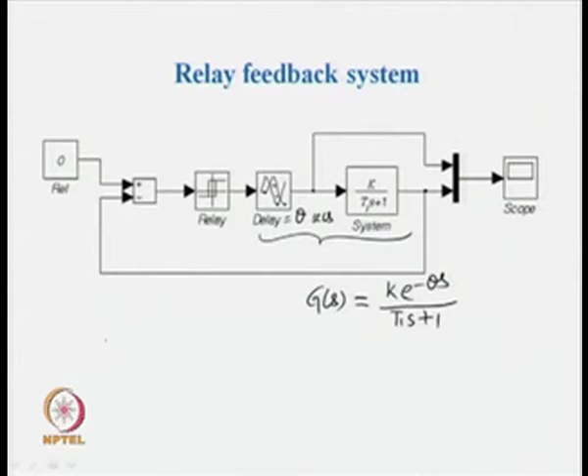We have derived analytical expressions for this simple system, the first order plus dead time system, and found that the output is governed by two expressions: y(t) equals k h times (1 minus e to the power minus t upon t1) for the time range 0 less than or equal to t less than or equal to theta, and y(t) equals k h times (2 e to the power minus (t minus theta) by t1 minus e to the power minus t by t1, minus 1.

This second expression holds for the time range theta to pu by 2.

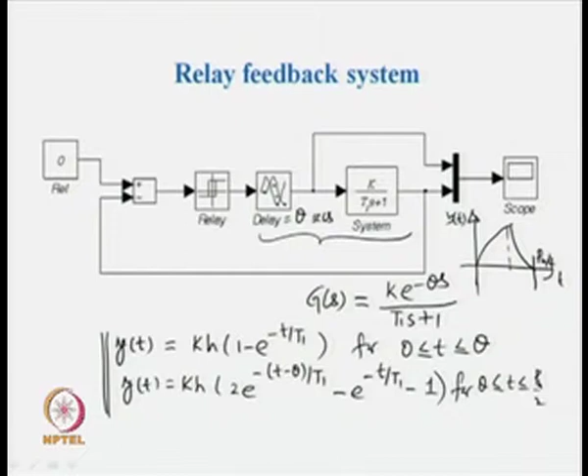So these two equations for y(t) can be plotted, and in that case the output will take this shape, where the time span is pu by 2, the peak occurs at time t equal to theta, and the plot begins at time t equal to 0.

We have also derived analytical expressions explicitly meant for a stable first order plus dead time system, and those analytical expressions are found to be of these forms.

The condition for sustained oscillatory output is given by the expression: 2 e to the power minus (pu by 2 minus theta) by t1, minus e to the power minus (pu by 2) t1, minus 1, equals 0. This condition has to be met, then only one can expect sustained oscillatory output from a first order plus dead time system.

The peak amplitude of the relay test is expected to be obtained from the expression: Ap equals k h times (1 minus e to the power minus theta upon t1), assuming that the peak occurs at time t equal to theta.

This is not an assumption - as far as first order plus dead time systems and their relay tests are concerned, the peak definitely occurs at time t equal to theta. The analytical expressions give a plot for y(t) up to time t equal to theta, after which the values decrease because the input to the system changes from positive h to minus h. Because of this change in input, the output slides down and comes back to 0 at time t equal to pu by 2.

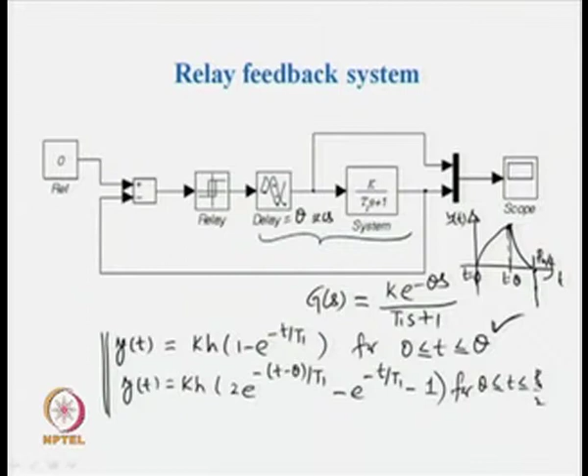Now these two expressions can be used further for identifying a simple transfer function model. What do we mean by a simple transfer function model? Let us consider initially the identification of an integrator with delay.

The identification of a system given by the transfer function G(s) equals k bar e to the power minus theta s upon s. So when the system is of this form, what sort of output is expected from the system?

Under relay test, we know that for such a system the output will be triangular pulses only. We will concentrate on only the positive half of the output for developing analytical expressions, so let this be y(t) for time t from 0 to time t equal to pu by 2.

Where the peak occurs we do not know, but we shall make use of these expressions to find explicit expressions for the parameters of this transfer function model. This model has two unknowns, k bar and theta, and explicit expressions will be obtained for them using measurements like peak amplitude and the half period pu by 2.

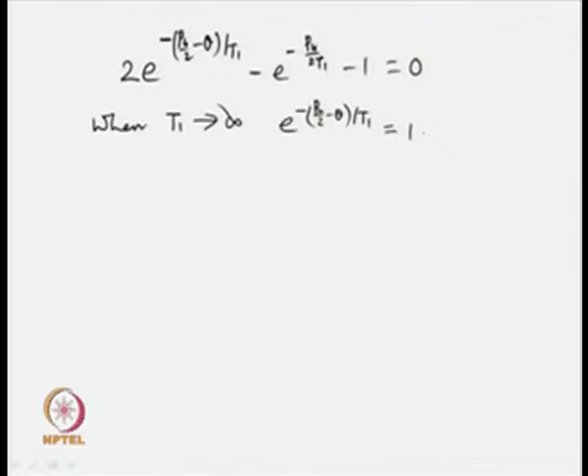The exponential term e to the power minus pu by 2 minus theta by T1 can be written in the form of 1 minus pu by 2 minus theta by T1. Why is that so? Because when T1 tends to infinity, the exponent will be a small number, and exponentiation of a small number can always be approximated by the term e to the power x, where x is small, becomes 1 plus x, and e to the power minus x becomes 1 minus x when x tends to 0.

So when T1 tends to infinity, the whole exponent will be a small number, enabling us to write the exponential term in the form of 1 minus pu by 2 minus theta by T1. Similarly, e to the power minus pu by 2 T1, when T1 is a very large number, can be written as 1 minus pu by 2 T1.

So, when these are substituted in the expression, we obtain 2 times (1 minus pu by 2 minus theta by T1) minus (1 minus pu by 2 T1) minus 1 is equal to 0.

Which upon simplification again gives us 2 minus pu by T1 plus 2 theta by T1 minus 1 plus pu by 2 T1 minus 1 is equal to 0.

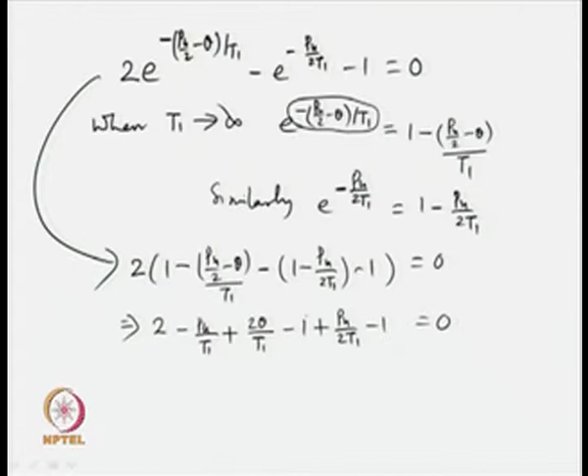Now, this minus 1 and plus 2 cancel out, leaving us 2 theta by T1 on the left hand side and pu by 2 T1 on the right hand side.

So ultimately, when this limiting condition is substituted in the limit cycle condition of a first order plus dead time system, what do we get? We get the expression 2 theta upon T1 is equal to pu by 2 T1, which further gives us theta is equal to pu by 4.

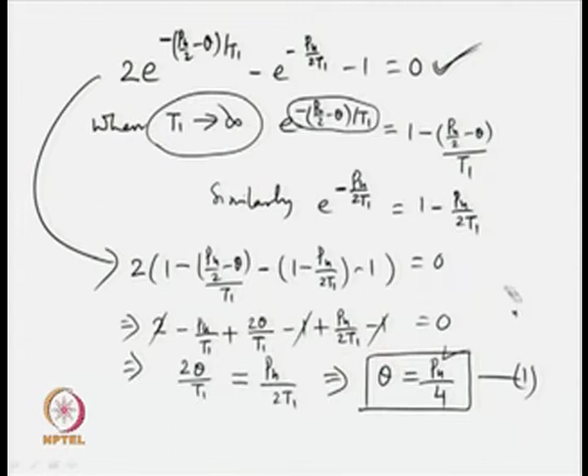Let this be equation number 1. So, what we have obtained from this analysis is that for a simple system like an integrator with a delay, the delay can be estimated within the measurement pu, or period of the output signal, using equation 1. So theta is estimated using the measurement pu, giving theta equal to pu by 4. This is the explicit expression we have obtained using the measurement pu, or pu by 2, the half period of oscillation.

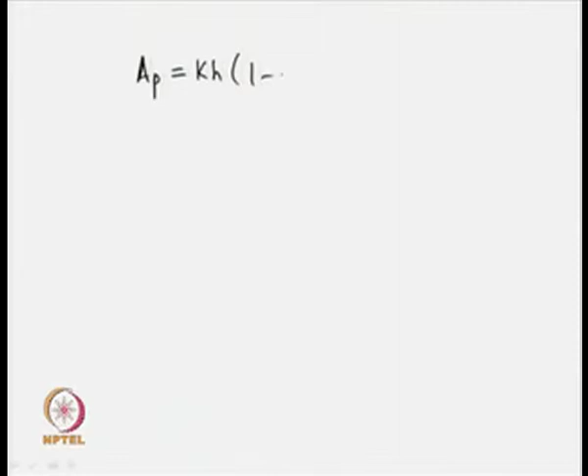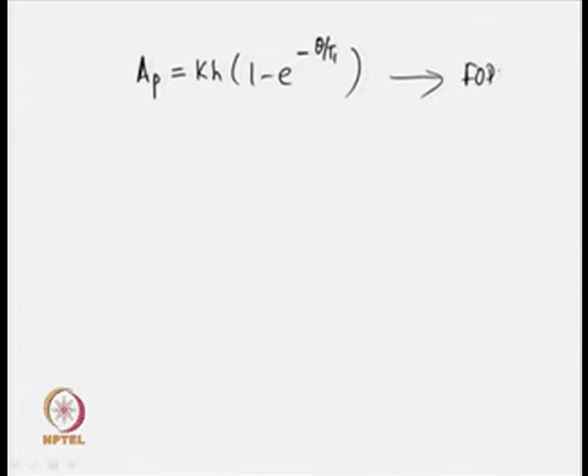Let us use the second expression. We also know that the peak amplitude of the output signal, AP, is given by AP equals kh times 1 minus e to the power minus theta upon T1. This is what we get for the first order plus dead time stable system.

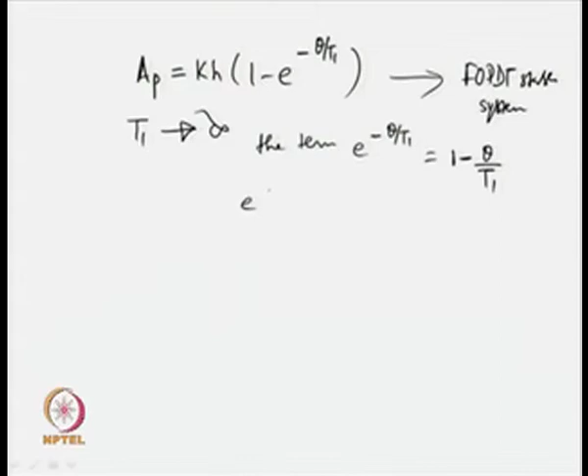Now, when the limiting value is put here, when T1 tends to infinity, then AP will be equal to kh times 1 minus e to the power minus 0. So it will be... no, we cannot put that directly, sorry, again I have to make use of the condition that when T1 tends to infinity, the term e to the power minus theta upon T1 will be given by 1 minus theta upon T1, the way we obtained earlier using the condition that e to the power x equals 1 plus x, and e to the power minus x equals 1 minus x, when x tends to 0.

So when T1 tends to infinity, we get e to the power minus theta upon T1 as 1 minus theta upon T1, giving AP equal to kh times 1 minus theta by T1, which is ultimately kh times theta by T1. Again, we know that k by T1 is k bar, which gives us k bar h theta, since k by T1 is finite and given by k bar. Thus this enables us to write an expression of the form k bar equals AP by h theta. This is equation number 2 for us.

How can we use this expression for estimating the unknowns of the transfer function model? Measure AP. Theta has been earlier obtained using the expression theta equals pu by 4. So how can we estimate the unknowns? Measure AP, the peak amplitude, and half period pu by 2. Then using this, theta can be estimated, half of the half period pu by 2 gives us theta. Thus the unknown time delay associated with the transfer function model is estimated.

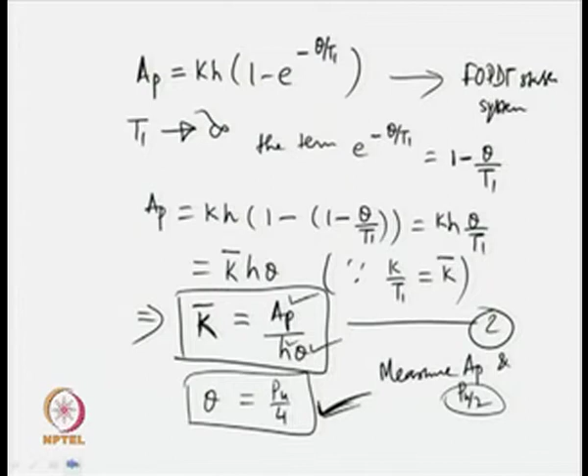So let me summarize these two things. Using these two expressions, conditions for sustained oscillatory output obtained for a first order plus dead time stable system, it is possible to find theta equals pu by 4 and k bar equals AP by h theta, which can be used to estimate the unknown parameters k bar and theta associated with our transfer function model Gs equals k bar e to the power minus theta s upon s. So if a system has such dynamics, an integral system with dead time, then it is possible to make measurements of the output signal, measure AP and pu, or AP and pu by 2, and use these explicit expressions to estimate the unknowns associated with this transfer function model.

Then the question may come, how can we apply this technique for estimating the transfer function model? We have to observe the output signal. The output signal from the relay test must be of triangular form, only then are we allowed to make use of these two expressions to find the transfer function model for the dynamics of the system. So the actual system is expected to have dynamics of this form, and then the measurements can be translated into the transfer function model parameters using these two expressions.

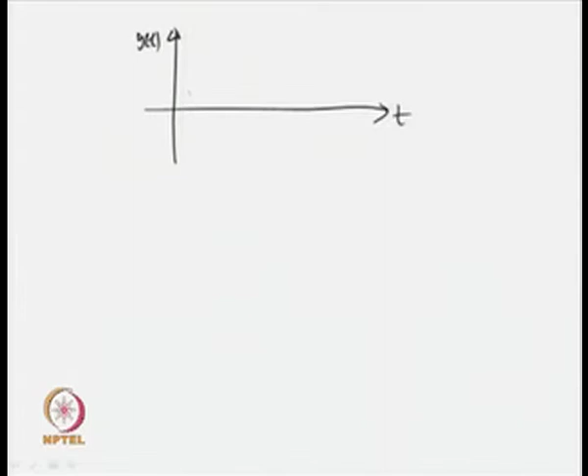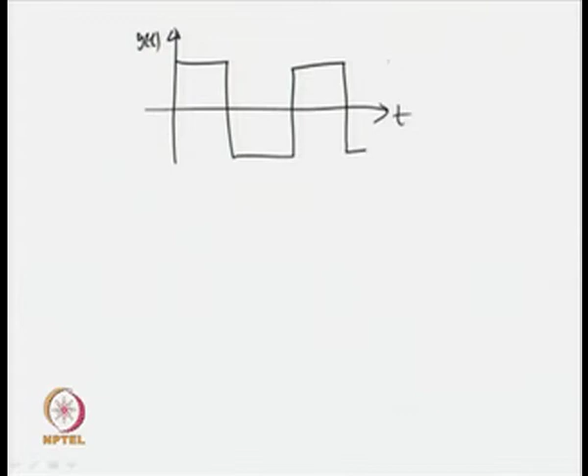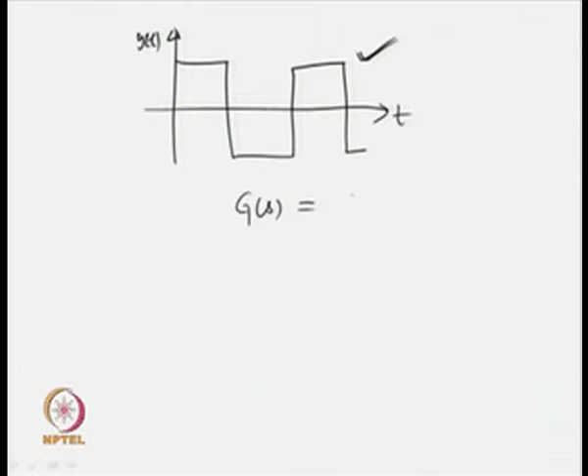Let the relay test results in output of the form shown over here. So when the output of a relay test is of this form, what sort of transfer function do we have to find for the dynamics of that system? The transfer function can be of the form G(s) = k times e to the power minus theta s. This we know because when a relay test is conducted on a system having this dynamics, rectangular or square pulses are obtained as the output of the system.

Now from here, what is the half period? Then pu by 2 is this much, and what is ap? ap is the output we obtain here. So this is ap and this is pu by 2. This is how we can make measurements on the output of the relay test, and the output will give us parameters like ap and pu by 2.

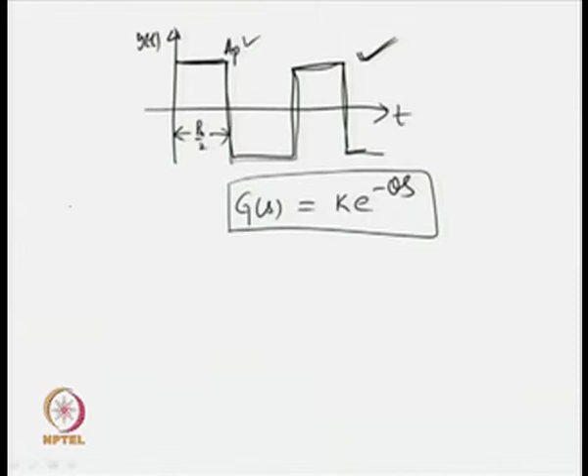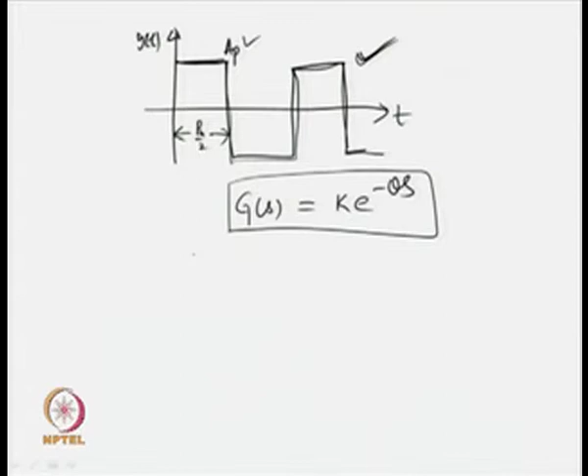So assuming that the relay test is inducing output of this form, we shall go for identification of the dynamics of the system in the form of G(s) = k e to the power minus theta s. The transfer function model has got two unknowns, k and theta. Therefore we need to find two expressions associated with k and theta in terms of the measurements ap, pu by 2, and h, the relay input to the system or the relay output.

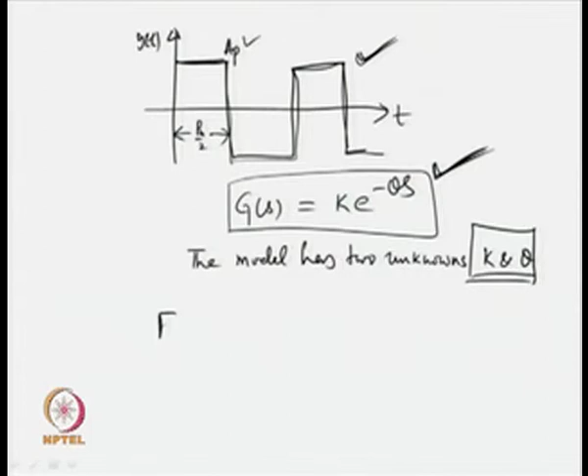Then how can we obtain such a model? We can obtain such a transfer function model from the general first order plus dead time model given by G(s) = k e to the power minus theta s upon T1 s plus 1. Why do I target this particular first order plus dead time transfer function model?

Because we have derived analytical expressions for the first order plus dead time transfer function model, and those two analytical expressions can be exploited, can be used, to obtain analytical expressions for simpler models of this form, provided it is possible to get this transfer function model from the general one. So how can we obtain it?

When T1 tends to 0, the first order plus dead time transfer function model will be G(s) = k e to the power minus theta s. Then this limiting value can be put in the expressions obtained for the first order plus dead time transfer function model, and that will enable us to derive simpler, explicit expressions to find the unknowns of the transfer function model G(s) = k e to the power minus theta s.

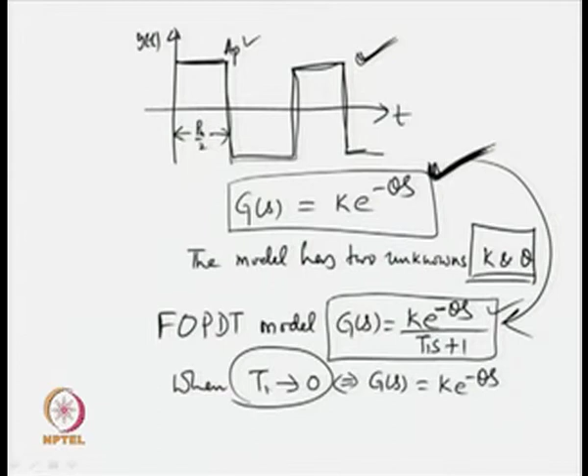So we shall make use of those expressions now with the limiting condition that T1 tends to 0. One has to be very careful when applying limiting conditions to analytical expressions. You must follow some logic. Now, when T1 tends to 0, let us see the second expression, the output expression, the peak amplitude expression first, which is a bit simpler to us.

AP becomes AP is equal to kh times 1 minus e to the power minus theta upon T1. So this will give us the condition that when T1 tends to 0, this will be equal to kh times 1 minus 0, which is equal to kh. Why is that so? Because as T1 tends to 0, e to the power minus theta by T1 will be equal to e to the power minus infinity, which is equal to 0. So that way AP becomes kh when T1 tends to 0, which gives us an expression of the form AP = kh, which can ultimately be expressed as k = AP by h. So one unknown of the transfer function model can be estimated using this relationship, where k is equal to AP by h.

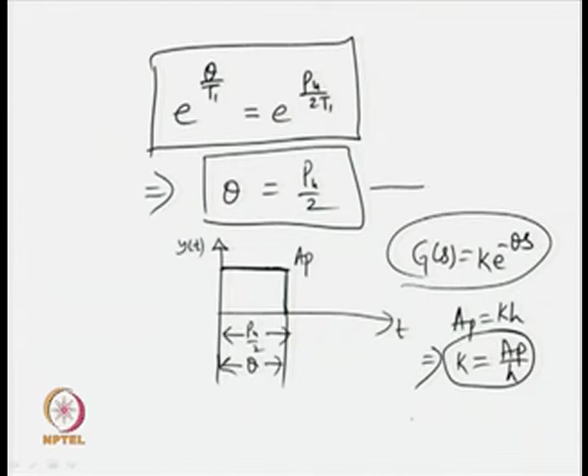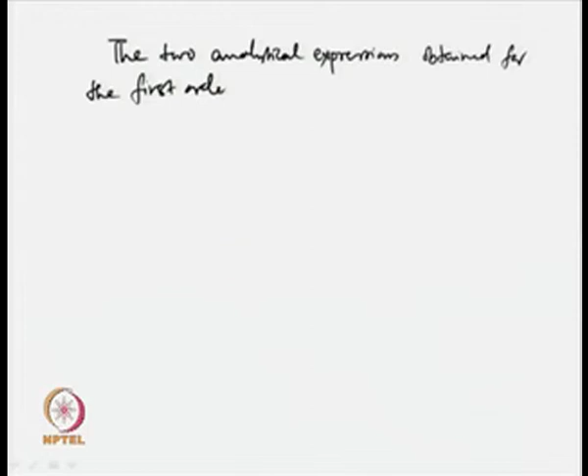So, it has been illustrated how powerful the two expressions are. These are the two analytical expressions obtained for the first order plus dead time transfer function model.

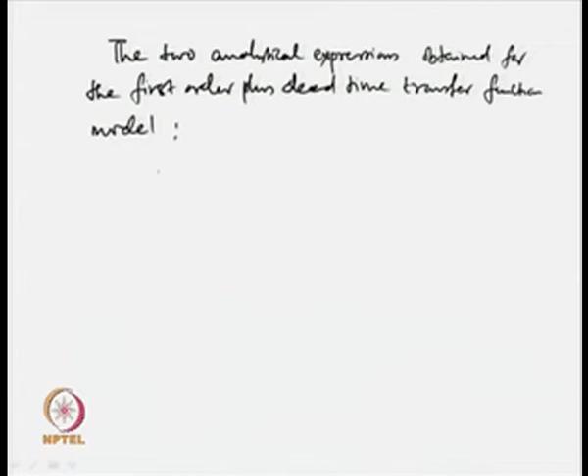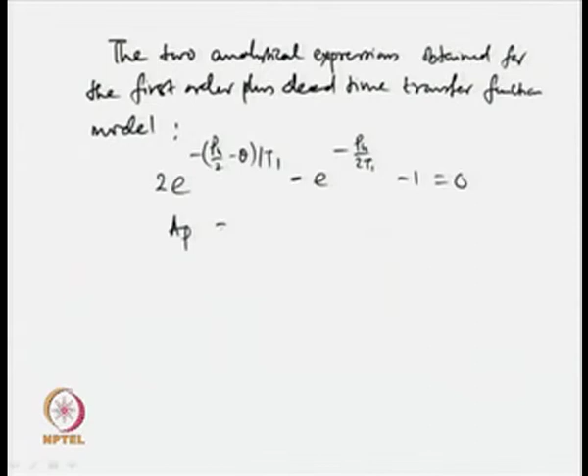Those are: 2 e to the power minus pu by 2 minus theta by t1, minus e to the power minus pu by 2 t1, minus 1, equals 0; and AP equals kh times 1 minus e to the power minus theta by t1.

These two can easily be extended for finding transfer function models of the form g(s) equal to k e to the power minus theta s, or of the form g(s) equal to k bar e to the power minus theta s upon s, with the limiting values, in this case t1 tends to 0, and in this case t1 tends to infinity, and k bar equals k upon t1 is finite.

So, we have developed two powerful equations for the first order plus dead time stable system. What happens to these expressions when we have first order plus dead time unstable systems?

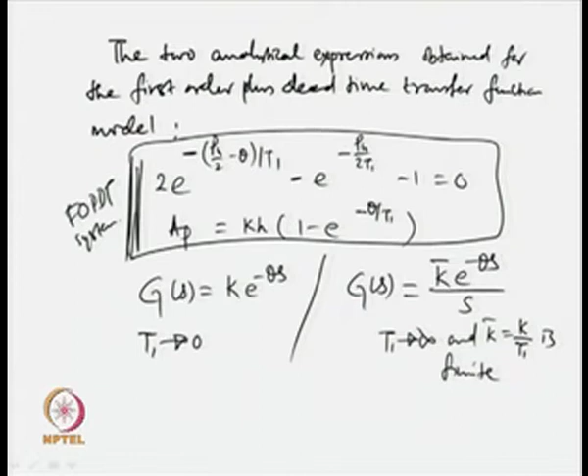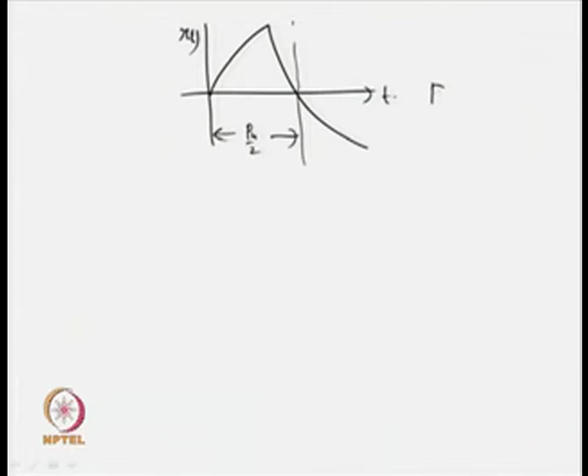This is the half period pu by 2, this is my y t, and this is t. So, this is what you get from a first order plus dead time system.

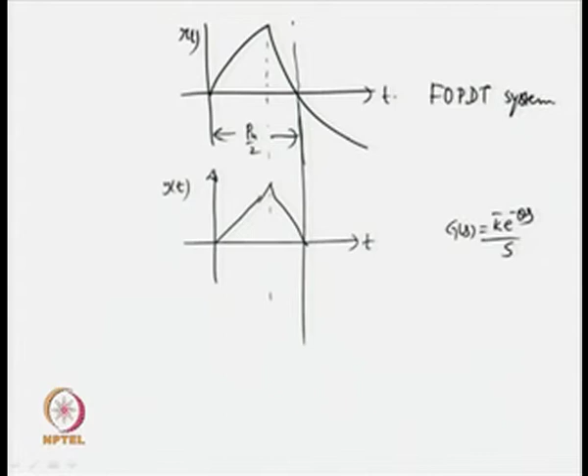Now, when we have a simpler system whose dynamics is given by the transfer function g(s) equals k bar e to the power minus theta s upon s, then the corresponding output becomes triangular in fashion, and when the system has dynamics k e to the power minus theta s, the corresponding output from the system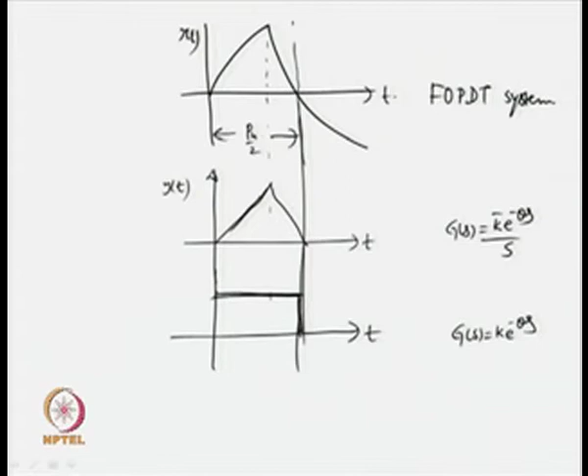assumes a pulse of this form. So, looking at the shape of the output signal, we can decide about the type of transfer function model we should choose for obtaining the dynamics of the real time system.

So, in this case it is k e to the power minus theta s upon T1 s plus 1. So, assuming that we have a stable first order plus dead time system, an output of this form is expected.

Then when we have a simpler system which has an integrator with delay, the output will have this shape. When we have a system with a gain and a delay only, then the output will be of this form. So, the point of mentioning all these things is that we can easily measure the peak amplitude in all cases, AP,

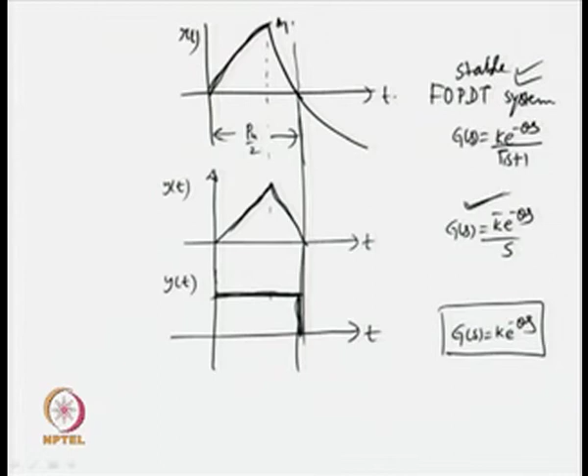and this is the AP, and we can easily measure the half period pu by 2, employing zero crossing detectors and peak detectors. To find the peak amplitudes, employ peak detectors, and for finding the half periods you employ a zero crossing detector.

Measure AP and pu by 2, and use the analytical expressions we have found. So, for the stable first order plus dead time system, what are the analytical expressions? Use the first two analytical expressions and solve them simultaneously to obtain the unknowns associated with the transfer function model.

Whereas, when the output of the system is of this rectangular form, then use the expressions k is equal to AP by h, and theta is equal to pu by 2. But in this case, we have k bar, not k, k bar is equal to AP by h theta, and theta is equal to pu by 4.

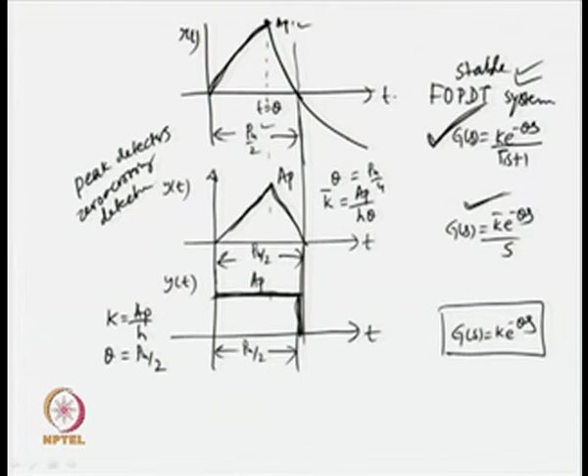As far as first order plus dead time systems are concerned, the peak occurs at time t equal to theta. This is an interesting observation. At time t equal to theta, the peak amplitude occurs. Therefore, the time at which the peak occurs, t equal to theta, can be easily read from the output signal. So theta can easily be obtained from that. Theta need not be estimated using analytical expressions; rather, theta can be obtained from the output information, like the peak amplitude of the output occurring at time t equal to theta. Read off this value, time t equal to theta. Therefore, theta is known for us.

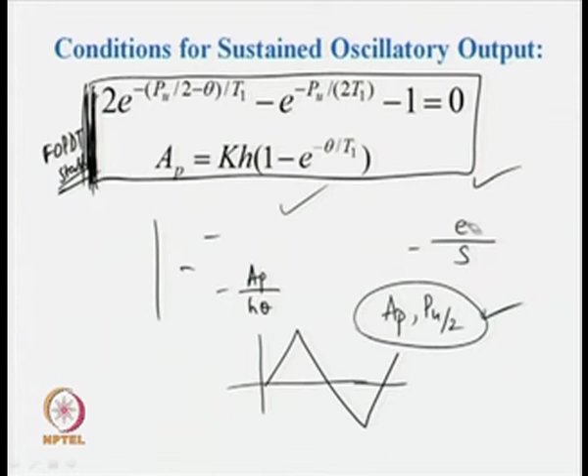Then the remaining unknowns are k and t1. The two analytical expressions can be used to estimate k and t1 instead of theta and t1. Why am I mentioning this? Suppose the time delay theta of the transfer function model is obtained from the output signal, then we are left with two more unknowns, k and t1. These can be estimated from the solution of two nonlinear equations. So equations 1 and 2 can be solved simultaneously to estimate k and t1. In that case, k need not be known a priori; k can also be obtained using the analytical expressions.

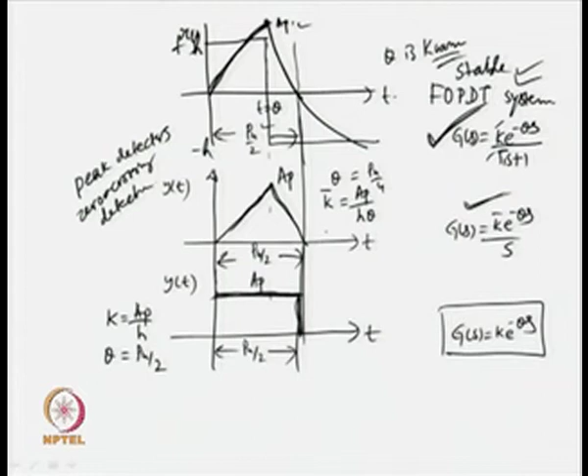Now there is one more technique to find the time delay theta associated with transfer function models. One can take the first order derivative of the output signal. In that case, there will be a sharp change in the first order derivative of the output signal at time t equal to theta. Why does that happen? We know that the input to the system is changing at time t equal to theta. So the input becomes minus h at time t equal to theta, but prior to that the input remains positive h.

So what I mean by that: given a first order plus dead time system, when a relay test is conducted, it is expected to obtain the output y(t) in this form. Now if I wish to find y dot t, what will happen? There will be sharp changes in this y dot t at time t equal to theta. Why is that so? Because the output signal is not continuous. As far as the half period Pu by 2 is concerned, we have outputs from different inputs, the inputs are changing. Therefore we have two segments, one for this and one for this - I cannot have the plot for the whole half period using one analytical expression. So I have two expressions for that. To plot this part of the output signal, I use y(t) equal to something for time 0 to theta. Similarly, for the other part of the output, I use some expression y(t) for the time range starting from t equal to theta to t equal to Pu by 2. That means we have a discontinuity. So this output is not continuous, therefore when its first order differentiation is obtained, we will definitely have discontinuity at time t equal to theta.

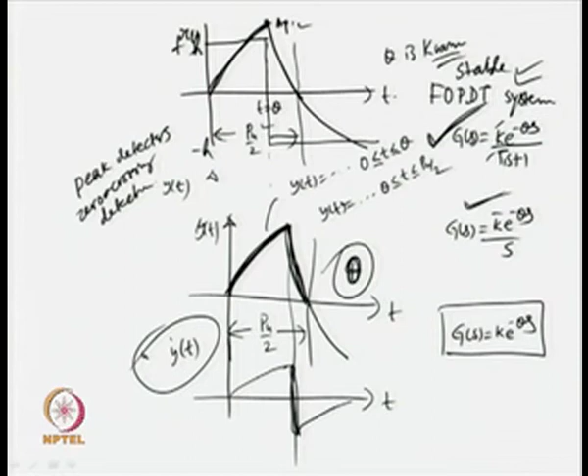That is how, employing that concept, it is possible to estimate the time delay parameter of the transfer function models. Once the time delay parameter, one unknown of the transfer function model, is obtained using the same output signal, we are left with two more unknowns in the first order plus dead time model, k and t1. Therefore k and t1 can be estimated using the two nonlinear equations we have obtained. Fortunately, for simpler systems like a system with an integrator and delay, and a system with a gain and delay, we have only two unknowns. Therefore the two explicit expressions we have obtained can be used to estimate the unknowns associated with the transfer function models. So this is one powerful technique we have for the identification of simple transfer function models using a relay test or by conducting a relay test.

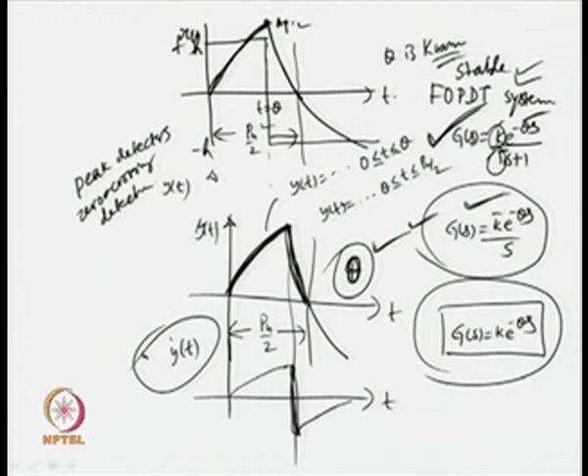I will summarize now.

So, what we have studied in our lecture: identification for simple systems is discussed. We have obtained explicit expressions for the parameters of simple transfer function models, like a transfer function with an integrator and delay, and other simple transfer functions like a gain with a delay. We have derived explicit expressions for the unknowns of those simple transfer functions in terms of measurements made on the output waveform.

Now, the general expressions found for the stable first order plus dead time systems have been extended for lower order dynamic models. How has that been possible? With the limiting condition that T1 tends to infinity such that k upon T1 equals k bar, which is finite, and the other limiting condition where T1 tends to 0. Using these two limiting conditions in the general expressions, we have been able to find simpler explicit expressions for the transfer function models of simpler systems.

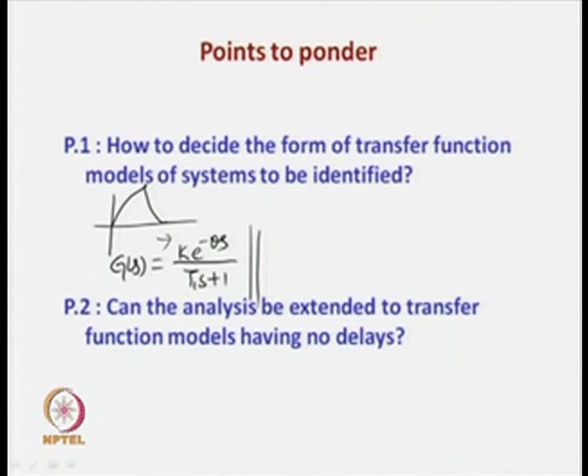As I already mentioned while summarizing the lecture, when the output of the relay test is of this form, go for the transfer function model G(s) = k e^(-theta s) / (T1 s + 1), and assume that one unknown of this transfer function model is known a priori, then estimate the remaining two unknowns using the analytical expressions. Or when the shape of the waveform is triangular, go for the transfer function model of the form k bar e^(-theta s) / s. When the output y(t) is rectangular, go for the transfer function model G(s) = k e^(-theta s). Now, what happens when the output is not of these forms?

In that case, we may have to consider higher order transfer function models, which we shall discuss in subsequent lectures. And the question is: can the analysis be extended to transfer function models having no delays? As you see, in these transfer function models a time delay is present in all of them. Is it possible to identify transfer function models without involving time delay?

Yes, it is possible. We can have a transfer function model of the form G(s) = k / (T1 s + 1)^n. These typical transfer function models are also often used for identifying system dynamics or real time system dynamics. This involves three unknowns: k, T1 and n. These three unknowns can be obtained using the analytical expressions. Again, in that case, we have to have prior information about one of the unknowns, and we can use the analytical expressions for finding the remaining two unknowns, T1 and n, or the set of unknowns k and T1, assuming n is known, and so on.

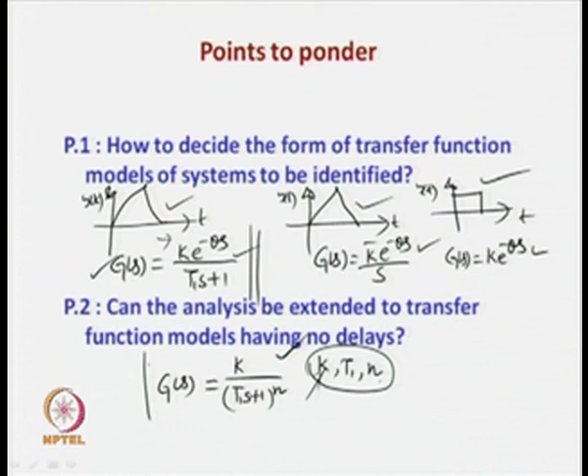We have obtained a transfer function model of a different form without involving time delays in it. That is all in this lecture. Thank you.